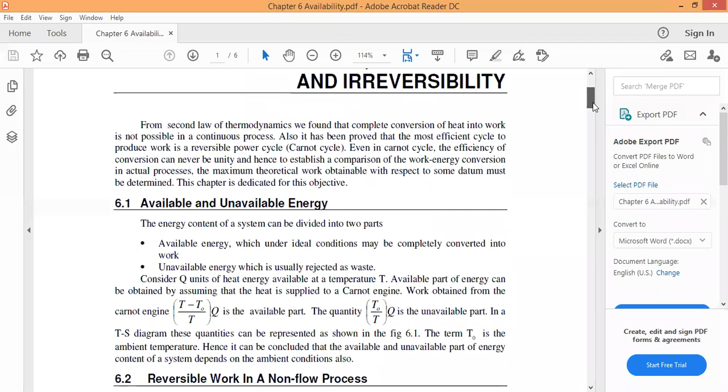Today, we are going to discuss the topic of available energy, availability, and irreversibility.

From the second law of thermodynamics, we found that complete conversion of heat into work is not possible in a continuous process because of some amount of losses that occur during conversion of heat into work. We also proved this by taking the Carnot cycle, which most efficiently produces work. Even in the Carnot cycle, the efficiency conversion can never be unity, because of at least some losses, nearly 99.99%, not 100% efficiency. The same applies for work energy conversion in the Carnot cycle, where the maximum theoretical work obtainable with respect to some datum is determined.

Okay, so now we are going to the new topic of available and unavailable energy. What is available energy? What is unavailable energy?

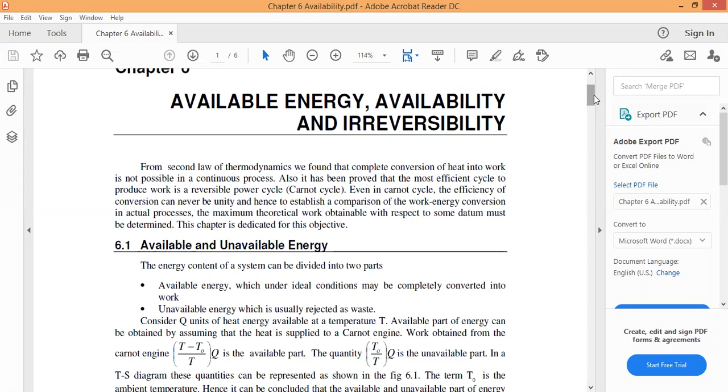Available energy is nothing but useful work, we call it available energy, and wasted work we call unavailable energy. The energy content of a system can be divided into two parts: available energy, which under ideal conditions may be completely converted into work, and unavailable energy, which is the loss of energy when the system does not give 100% of the supplied energy back as work.

Consider Q units of heat energy available at a given temperature. The available part of energy can be obtained by assuming that the heat is supplied to a Carnot engine. Work obtained from the Carnot engine is T minus T naught by T into Q, which is the available part of the energy. The quantity T naught by T into Q is the unavailable part, shown in the TS diagram. These quantities can be represented as shown in the figure, where T naught is the ambient temperature. Hence it can be concluded that the available and unavailable parts of the energy content of the system depend upon the ambient conditions.

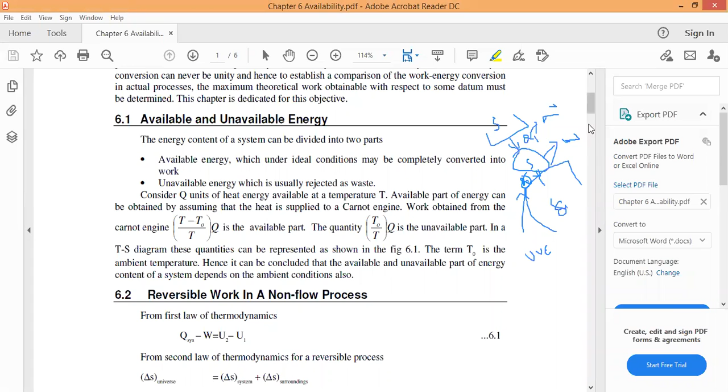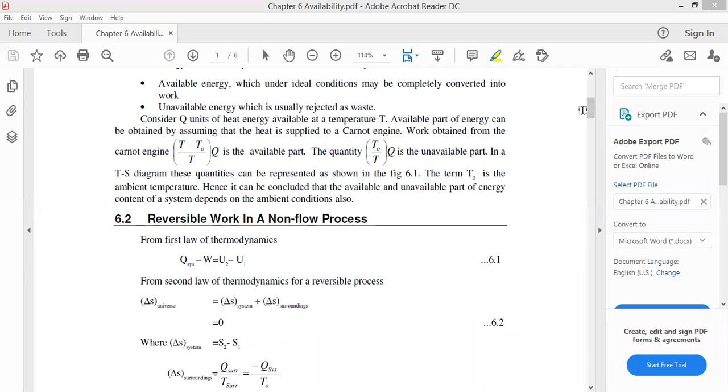Okay, so next we go to reversible work in a non-flow process. A non-flow process is a closed system, not an open system.

So when we take reversible work in a non-flow process, from the first law of thermodynamics: q minus w equals the change in internal energy. For the second law, for reversible processes, the change in entropy of the universe equals the change in entropy of the system plus the change in entropy of the surroundings, where the change in entropy of the system is S2 minus S1. For the surroundings, q surroundings by T surroundings equals minus q system by T naught, so q system equals T naught into (S2 minus S1), and the change in entropy of the system is S2 minus S1.

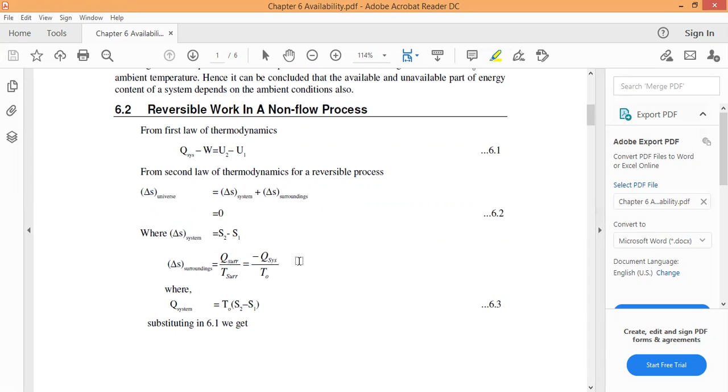So finally we get Q system is equal to T naught into S2 minus S1. We substitute this Q system into the first law of thermodynamics equation, Q system minus W is equal to U2 minus U1. So Q system here is T naught into S2 minus S1, placed into this equation.

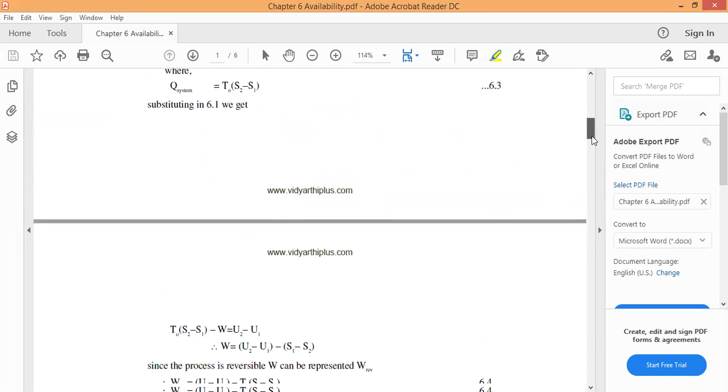W is equal to, U2 minus U1 is nothing but change in internal energy. So finally the work done we call W is equal to U2 minus U1 minus T naught into S2 minus S1.

Since the process is reversible, W can be represented as reversible work done. So we replace it: W reversible is equal to U1 minus U2 minus T naught into S1 minus S2.

This is also the maximum work in the process, for a closed system. This work done is for a closed system, and this we call the maximum work in the process. Next we go for work in a closed system.

In a closed system, when undergoing change in volume, work done is against the atmosphere. So the work done, for closed system which is piston and cylinder, is P naught into V2 minus V1. But this work is not useful work.

W maximum useful is nothing but max work minus atmospheric work. So this is the atmospheric work, and this is our maximum work: U1 minus U2 minus T naught into S1 minus S2.

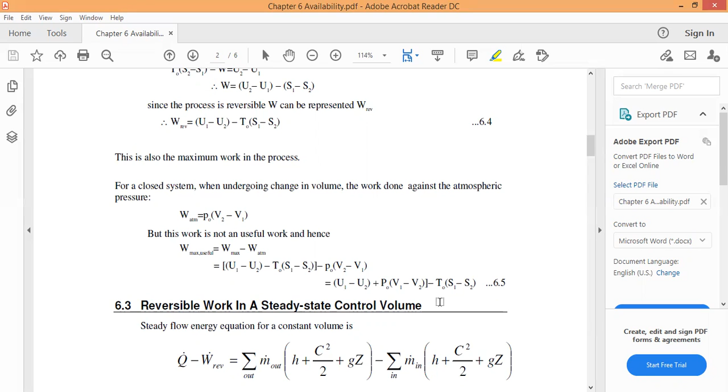Atmospheric work done of closed system is P naught into V2 minus V1. So finally we get U1 minus U2 plus P naught into V1 minus V2 minus T naught into S1 minus S2. This is our final equation.

Next step, reversible work in a steady state control volume. This is nothing but the steady flow energy equation for a control volume. We know Q minus W dot, with respect to time, involves mass out into h plus C square by 2 plus gZ, minus mass in terms of enthalpy, kinetic energy and potential energy, out minus in. This total equation we call the steady flow energy equation.

Finally we get the equation m dot into h2 minus h1 plus c2 square minus c1 square by 2 plus g into z2 minus z1. Delta here is nothing but what we call the datum.

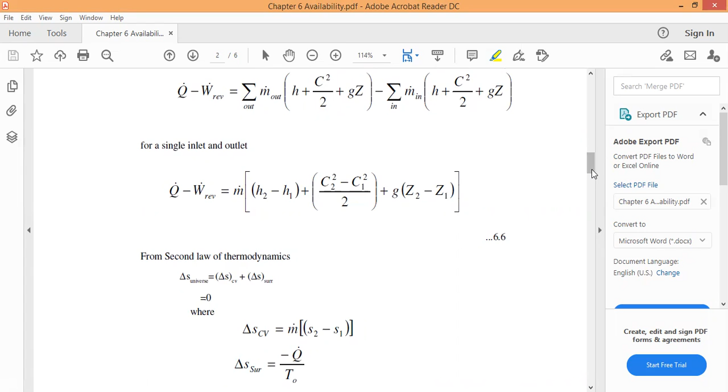From the second law of thermodynamics, delta S universe is equal to delta S system plus surroundings. Since it is a steady flow, the total entropy change of the universe is equal to zero. So delta S of control volume is m dot into S2 minus S1.

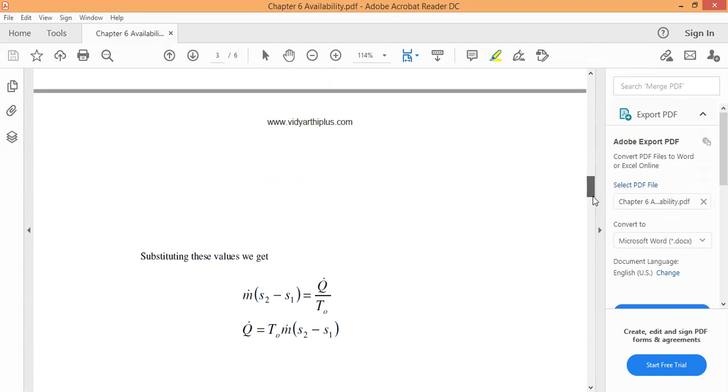The surrounding entropy change, delta S of surroundings, is nothing but minus Q by T naught formula. Substituting, finally we get Q dot is equal to T naught into m dot into S2 minus S1.

Now what is the work done reversible? M into H1 minus H2 minus T naught into S1 minus S2. We just replace and place that here. So this is our equation.

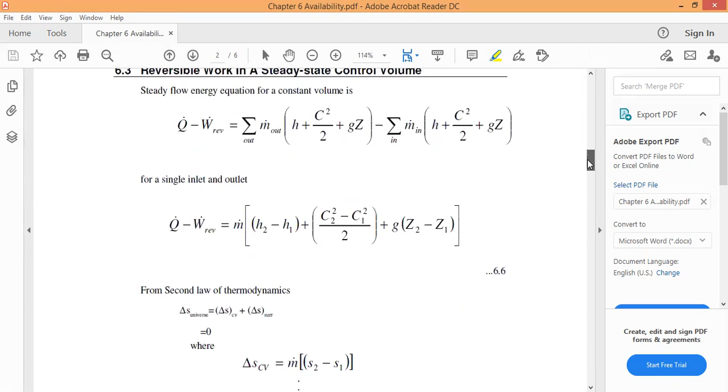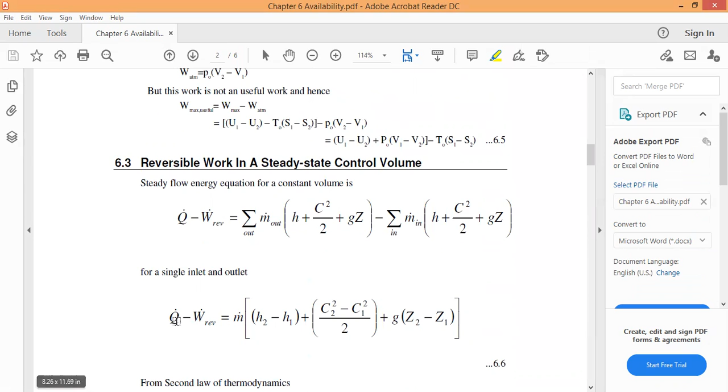We want W reversible, so we find and place the value of Q dot. Q minus W, where Q dot is T naught into m dot into S2 minus S1. Placing that in, finally we get W reversible is equal to m dot into H1 minus H2 minus T naught into S1 minus S2.

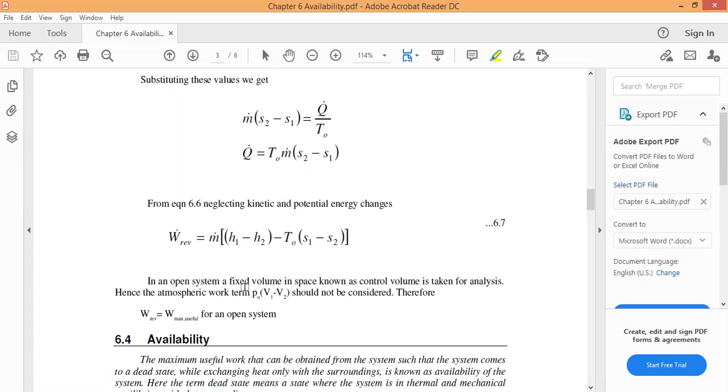In an open system, a fixed volume in space is known as the control volume, taken for analysis. Hence the atmospheric work term P naught into V1 minus V2 should not be considered. Therefore W reversible is nothing but W maximum useful, only for the open system.

So what I want to mention is that every time the work done in a reversible process is nothing but the useful work done, that is the maximum work. Next, availability.

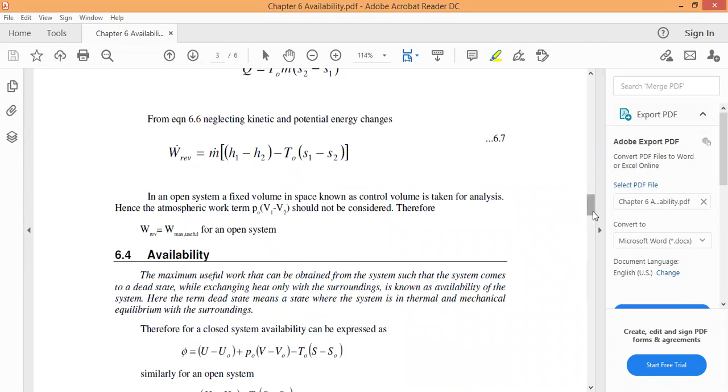What is availability? Availability is nothing but the maximum useful work that can be obtained from the system, such that the system comes to a dead state while exchanging heat only with the surroundings. So that is called availability. Overall, availability is nothing but useful work called the available energy.

Hence the term dead state means a state where the system is in thermal and mechanical equilibrium with the surroundings, that is, there are no changes. When both thermal and mechanical become in equilibrium state, that state we call the dead state.

So at that dead state, how is availability defined for a closed system? For a closed system, availability can be expressed as phi equals u minus u naught plus p naught into v minus v naught minus t naught into s minus s naught. Those terms relate to the dead state when the system is in thermal equilibrium with respect to surroundings. At that condition, for closed system, phi equals u minus u naught plus p naught into v minus v naught minus t naught into s minus s naught.

Next, similarly for open system, availability is nothing but h minus h naught minus t naught into s minus s naught. So there's often confusion here, students. For closed system, when the system is in dead state, availability is denoted phi, and we call it psi for open system. This is the availability for the system in dead state.

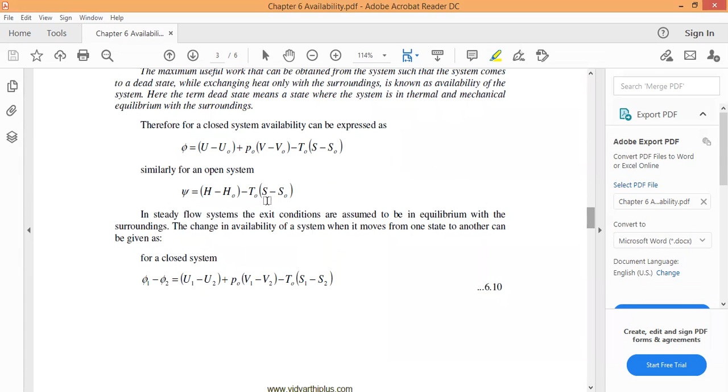Understand? Next, if in steady flow systems the exit conditions are assumed to be in equilibrium with the surroundings, we take the steady flow system where at the end the exit conditions are assumed in equilibrium state with respect to surroundings. So how does the availability change? The change in availability of a system as it moves from one state to another. For closed system this was the dead state formula, and this was open system. But here for steady flow process, only the exit state, not the initial state, is assumed as equilibrium state.

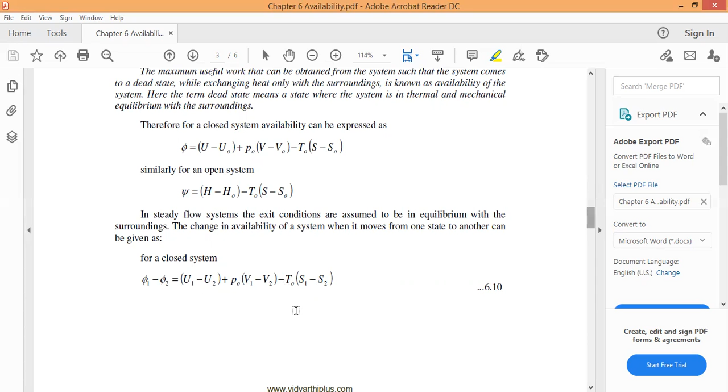So at that condition, what is the change in availability for closed system? phi1 minus phi2 equals u1 minus u2 plus p naught into v1 minus v2 minus t naught into s1 minus s2.

Understand, friends? The same applies here for open system, where the initial state is not fixed but the exit state is equilibrium state. At that condition, what are the changes of availability for open system and closed system? We already looked at the closed system, now let's look at the open system.

So what is the availability change for open system between initial state and exit state, where exit state is assumed as equilibrium state? At that condition, the change for open system, xi1 minus xi2 equals h1 minus h2 minus t naught into s1 minus s2. This is the equation for open system when the exit state is at equilibrium, but the initial state is not constant.

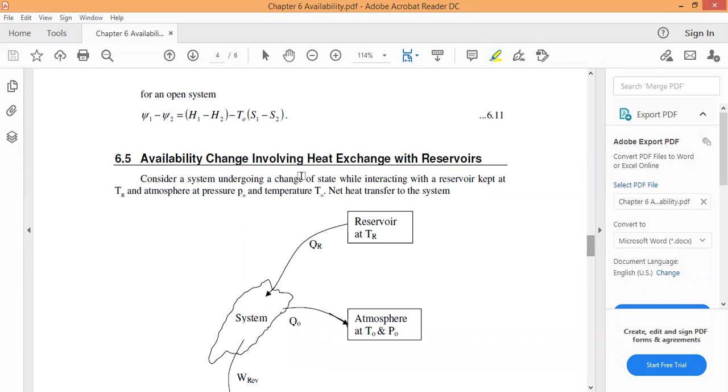Only the exit state is at equilibrium condition. At that condition we want the formula for availability. For open system, it is equal to h1 minus h2 minus t naught into s1 minus s2. That is the formula for availability, the difference of initial and exit state at the equilibrium condition.

Now, availability change involving heat exchange with a reservoir. Consider a system undergoing a change of state while interacting with a reservoir kept at TR, and with the atmosphere at P naught and T naught. There is net heat transfer directly to this. So this is our system, this is the reservoir, and this is the atmosphere. This is our reversible work.

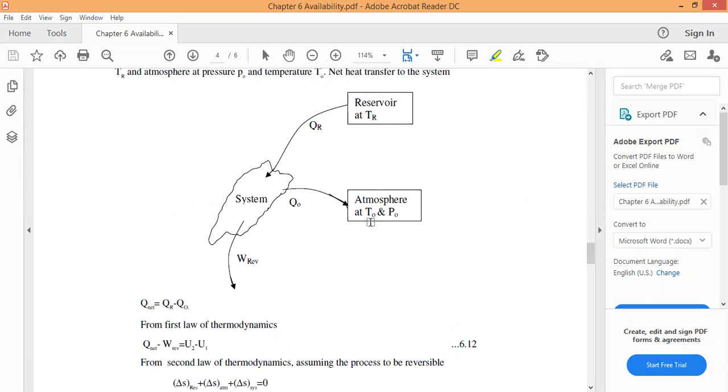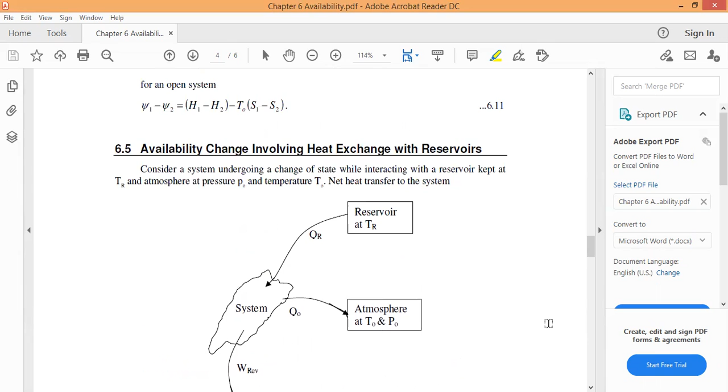So finally, what is the net heat? That is nothing but QR minus Q naught. This QR minus Q naught we call Q net. From the first law of thermodynamics, Q net minus W reversible equals U2 minus U1. And from the second law of thermodynamics, delta S reservoir plus delta S atmosphere plus delta S system equals 0. This is nothing but minus QR by TR plus Q naught by T naught plus, for the system, S2 minus S1.

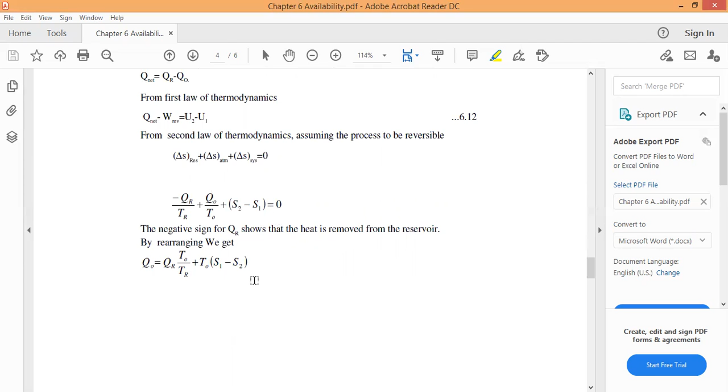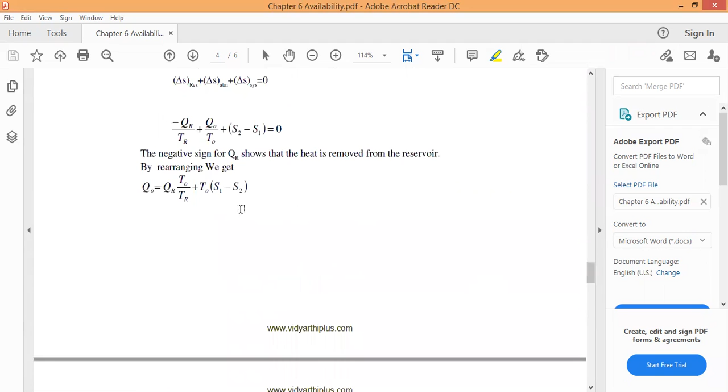So finally we rearrange it, and the negative sign here shows that heat is removed from the reservoir. So finally we got Q naught. Net heat transfer is nothing but Q net, which is equal to QR minus Q naught. So QR minus what is our Q naught?

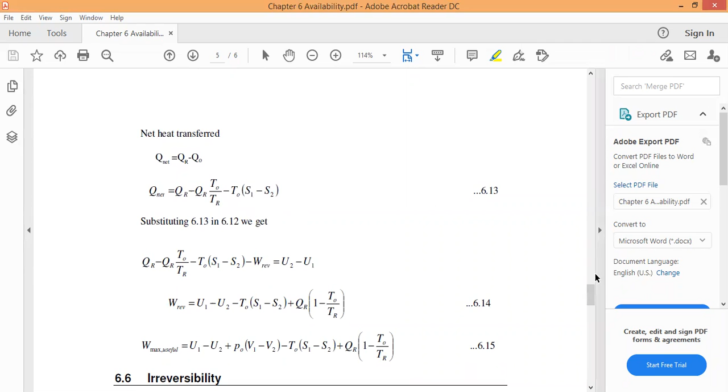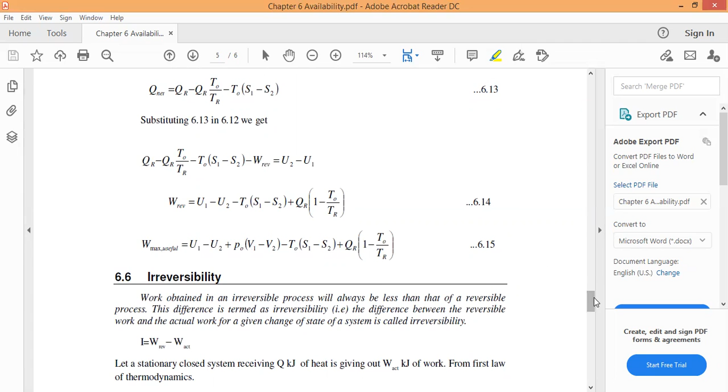Our Q naught is QR into T naught by TR, plus T naught into S1 minus S2. Just substitute here. So finally we get QR minus QR, and we get W reversible equals U1 minus U2, minus T naught into S1 minus S2, plus QR into 1 minus T naught by TR.

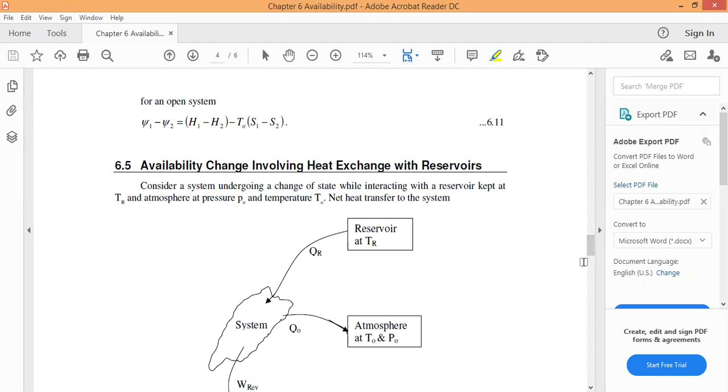This is our availability equation, for how the heat exchange occurs with reservoirs. So finally we got this important equation. And next, irreversibility - what is irreversibility?

We obtain that an irreversible process will always give less work than the reversible process, because it is an actual process. The difference is termed as irreversibility - that is, the difference between the reversible work and actual work for a given change of system is called irreversibility.

So how is irreversibility mentioned? We call irreversibility I, which is equal to work done reversible minus work done actual. So irreversibility is nothing but the difference of work done for reversible minus work done actual. This is a very important formula - irreversibility is the difference of work done reversible minus work done actual.

So let a stationary closed system receive Q kilojoules of heat and give out work done in kilojoules, from the first law of thermodynamics, Q minus W is nothing but U2 minus U1. We take W actual, so W actual is equal to U1 minus U2 plus Q.

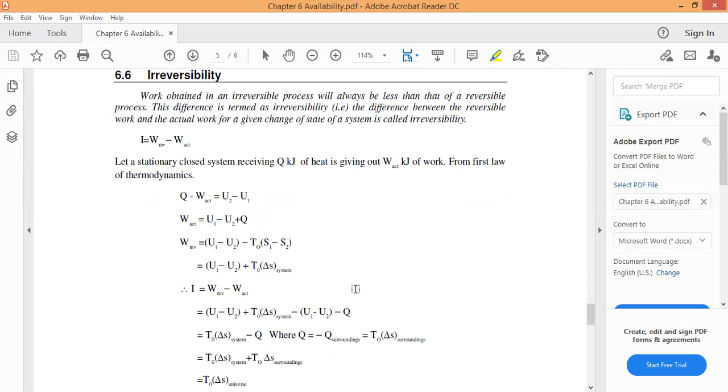So we write, because of reversible, T naught into S2 minus S1. This is for W reversible, and just put this in the equation: U1 minus U2 plus T naught into delta S system minus actual is nothing but this, and finally this is our Q.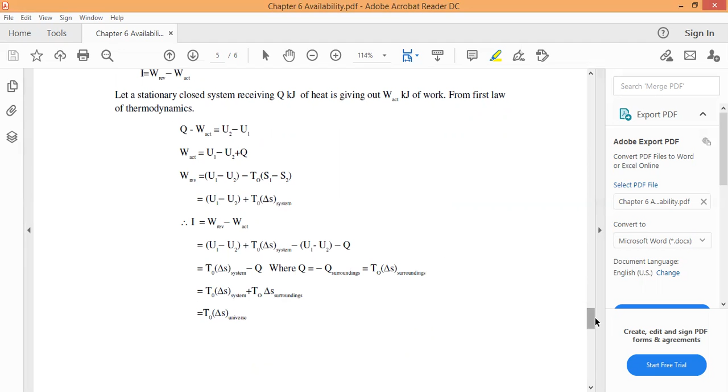Under the same concept here: since delta S universe will be positive for an irreversible process, irreversibility will be zero for a reversible process, and never negative. So delta S universe will never be negative - it is always greater than or equal to zero.

So what is the irreversibility formula? W reversible minus W actual. What is W reversible? m dot into h1 minus h2, minus T naught into s1 minus s2. So finally W actual is m dot into h1 minus h2 plus q dot. Substitute here, and finally we get T naught into delta S universe.

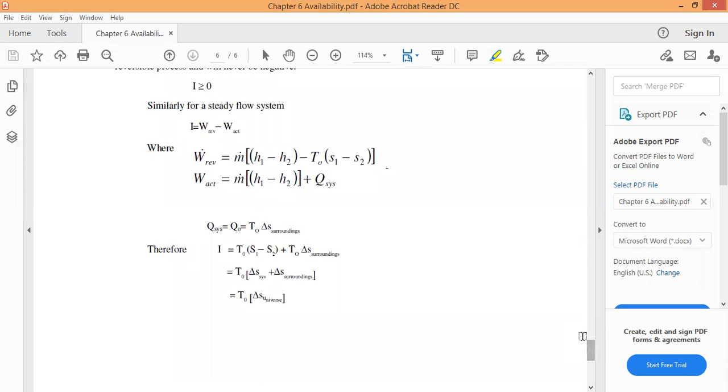This is for open system. In open system also, and closed system also, we got T naught into delta S plus delta S, giving T naught into delta S universe. So this is our irreversibility.

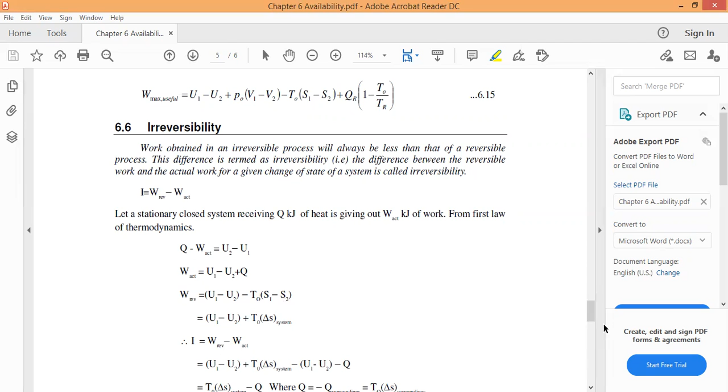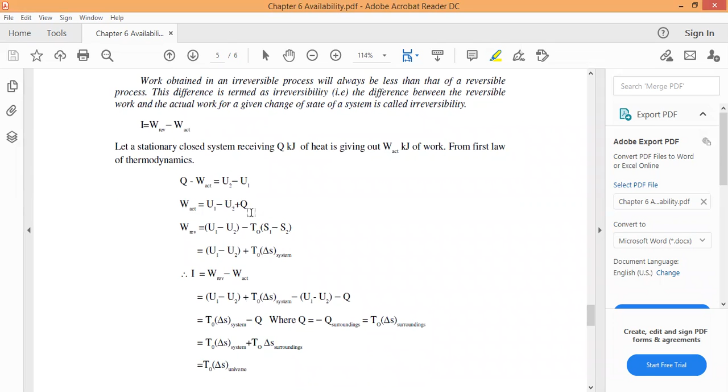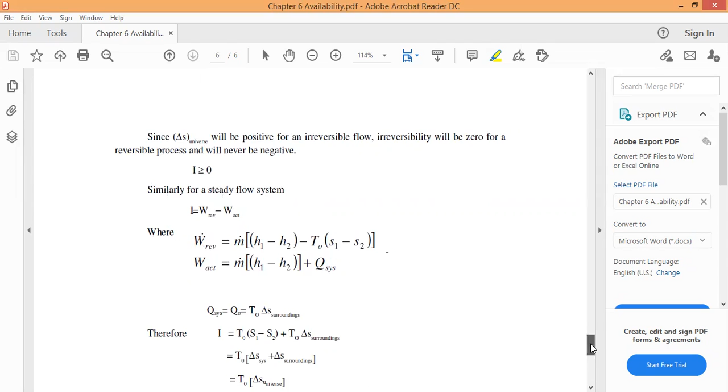And next, minus W actual. W actual is U1 minus U2 plus Q, and just substitute here - we get T naught into delta S universe. The same thing applies when we take W reversible in the form of open system and steady flow energy equation. Similarly, using the steady flow energy equation, we get the same result: T naught into delta S universe.

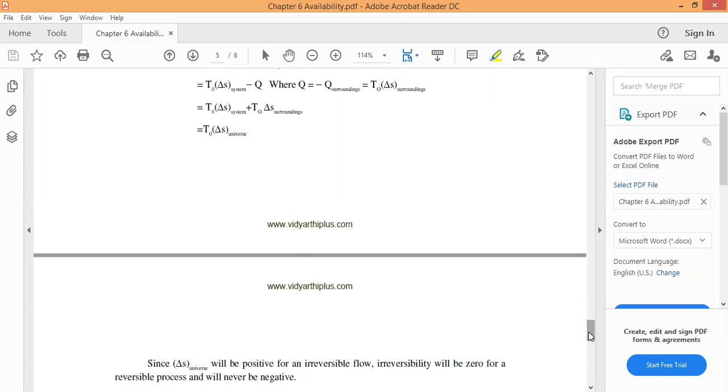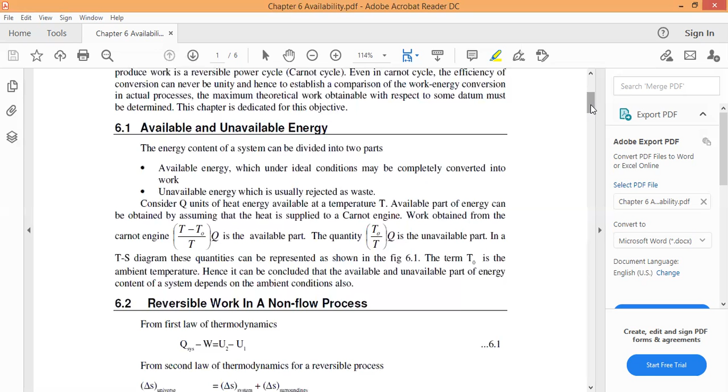So our irreversibility is always greater than or equal to zero - it will never be negative. So finally, what I want to mention is: available energy is nothing but useful energy, and unavailable energy is rejected energy, which we call unavailable energy.

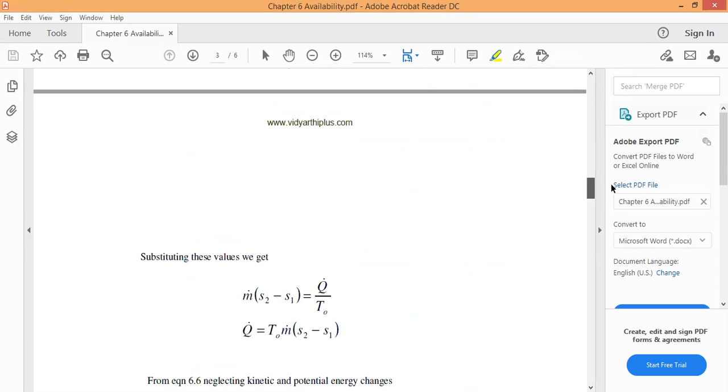So reversible work in a non-flow process - those are all the equations. Non-flow is nothing but a closed system. So those were just available - those are the formulas we should just remember, and they are very important.